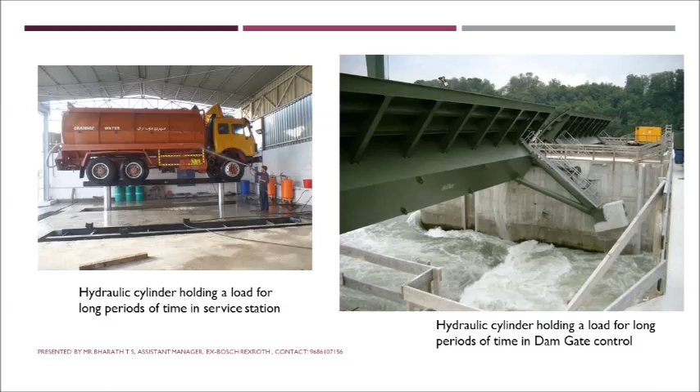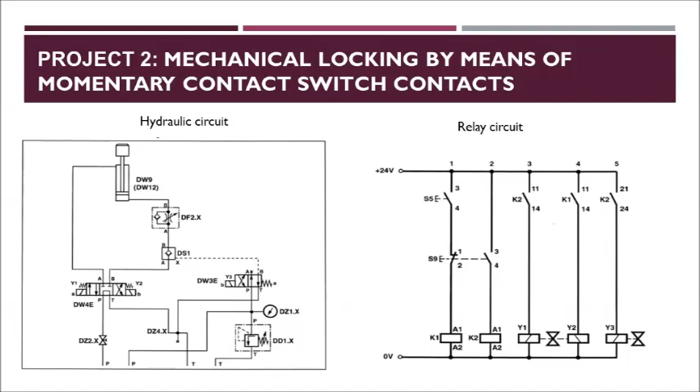Hello students, in this video I am going to demonstrate experiment number 2, where a pilot operated check valve is used to hold long time suspended loads. The title is mechanical locking by means of momentary contact switch contacts. First, I'll tell you the background of the circuit, and then we'll go to the simulation of this hydraulic circuit as well as relay circuit.

The name itself indicates mechanical locking of loads. Some applications are there. For example, in a service station, car or truck service station, the vehicle needs to be lifted upward for servicing, where service may take 30 minutes, 1 hour, or more than 1 hour, so that heavy load is held in a certain position for long periods of time. Another application is hydraulic cylinders used in dam gate control, where the heavy metal gate is held in a certain position for long periods of time by the hydraulic cylinder.

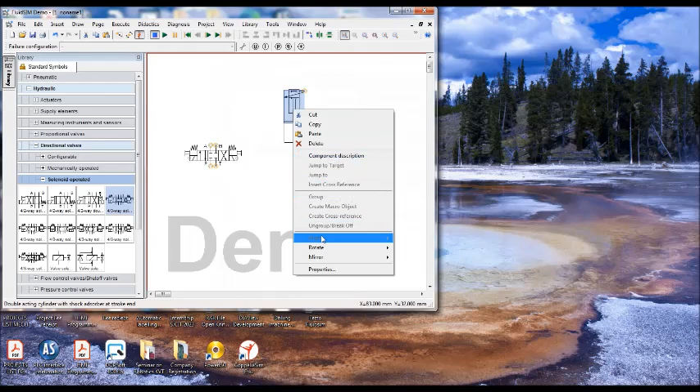Say a very large load is attached here, for example M, that is mass, a very large mass attached to the cylinder, and that is being controlled by a direction control valve which is solenoid operated. This is a 4x3 direction control valve, 3 positions are there, 2 solenoids are there, and for this valve, I want it this side, so AB is connected to actuator ports A and B.

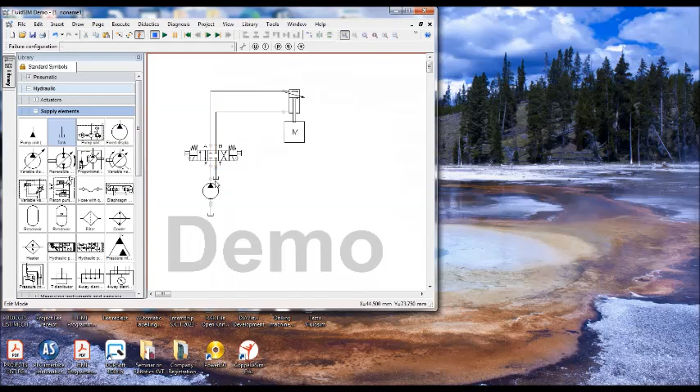And pump, you can consider as the fixed displacement pump, and then tank. So tank line is required here also. And next, since we are using fixed displacement pump, protection is required, so we should have the pressure relief valve. I did the protection here, and one more tank line is required here. So I should use a pressure gauge, which is available in measuring devices.

This is a very simple circuit, just we are discussing only the background of the experiment, we're not discussing the exact experiment yet. Here we should understand why we should use a pilot operated check valve. There are two types of check valve: a simple check valve or pilot operated check valve. That is the discussion we are doing here.

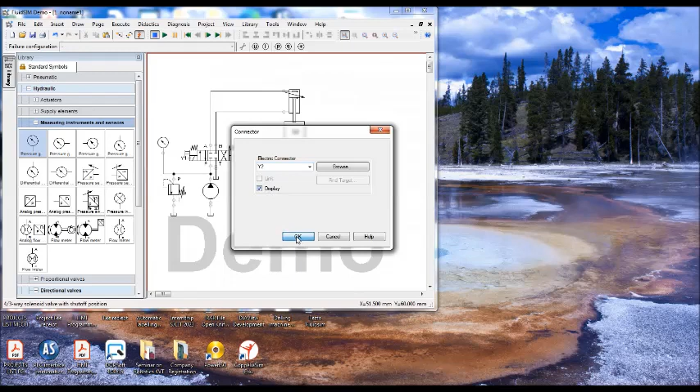This is a very simple experiment. There are three positions, and two solenoids called Y1 and Y2. All of you know the concept, right? When solenoid Y1 is on, what is the flow configuration? Flow configuration is P to A connection will be there, and B to T flow takes place.

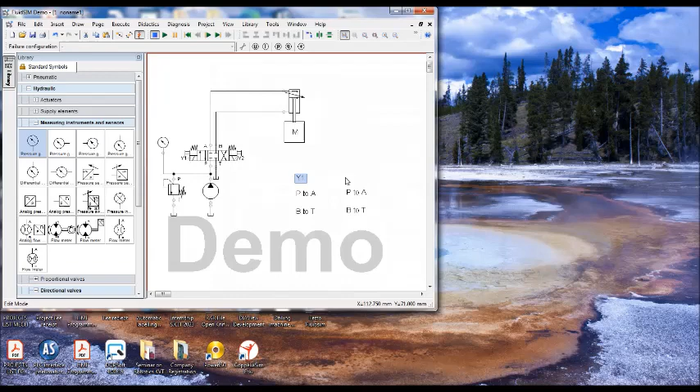This is when solenoid Y1 is on. Same thing when Y2 is on - what is the flow configuration? P to B, and A to T. This is the flow configuration.

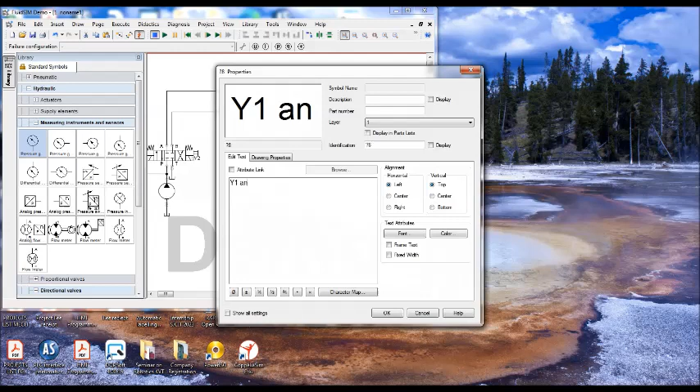So there is a third position, right? When solenoid Y1 and Y2 both are off, then what is the flow configuration? Flow configuration is all ports are blocked, that means there is no flow to A or B.

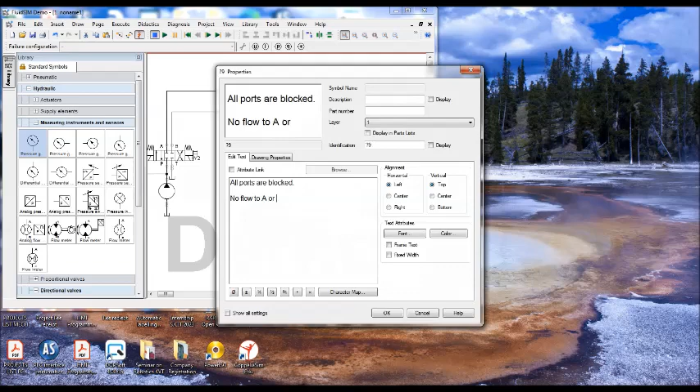To be precise, Y2 is on here, and this is Y1 is on. So when Y1 is on, P to A, B to T. When Y2 is on, P to B, A to T. When Y1, Y2 both are off, all ports are blocked - that is the middle position or neutral position, or home position we call it. There is no flow, so no movement. To be precise, in this circuit, as per the connection, if solenoid Y1 is on, the cylinder will move - it's a downward movement. When Y1 is on, downward movement.

Same thing, in the same way, when Y2 is on, it is an upward movement. So when solenoid Y1 and Y2 both are off, with respect to the connection we made, cylinder movement is stopped. So what it means is, when Y1 and Y2 both are off, cylinder is in stop motion. When Y1 is on, cylinder moves downward. When Y2 is on, cylinder moves upward as per the circuit.

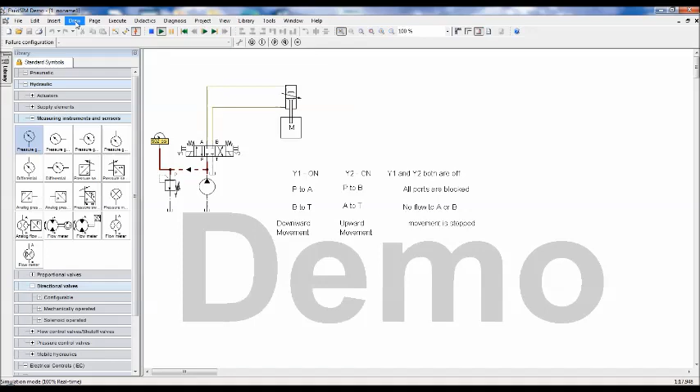Since all ports are blocked, movement is not possible theoretically. The graphical symbol also tells the same thing, so there should not be any movement. But what happens in practical is this is a spool operated valve. In spool operated valves there are two types of valves: spool operated and poppet operated types.

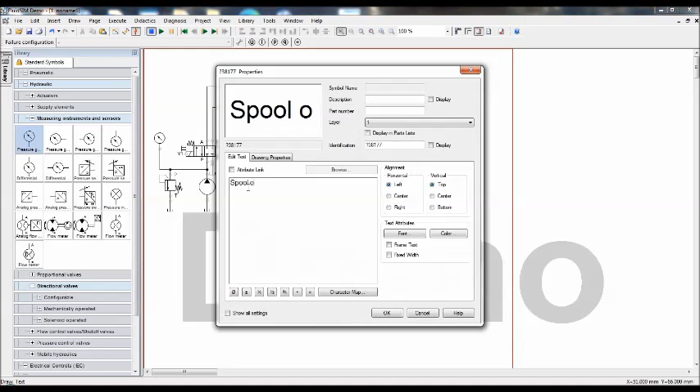So this valve is spool operated. The feature of spool operated valve is it has internal leakage. It is comparatively low cost compared to poppet operated valve, but it has internal leakage.

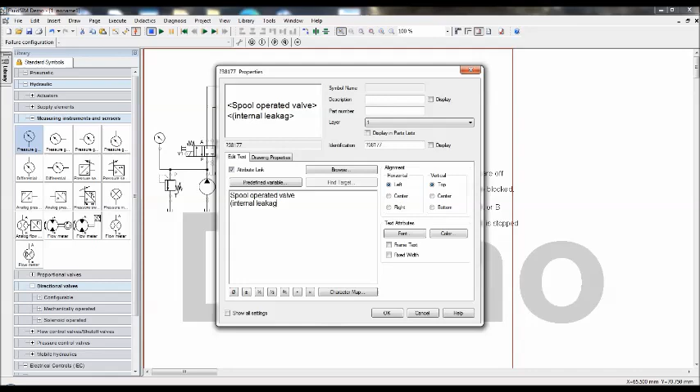So to be more precise, why internal leakage? Spool operated valve will obviously have a spool. In order for the spool to slide in the valve, there must be a radial clearance. Because of radial clearance, there must be a small leakage. There could be a small leakage from P to T, or P to A, or A to T.

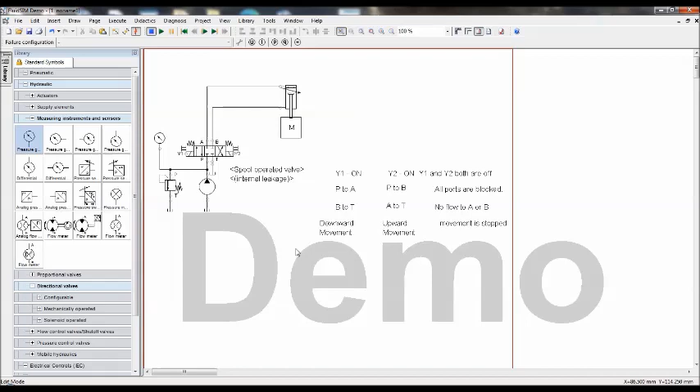So wherever a low pressure line is there, oil flows from high pressure to low pressure. Especially what we are talking about is this crossing of the lines. So that is the concept. Because of internal leakage, a small amount of oil from the rod chamber can leak to the tank because of radial clearance.

Assume that if the pump is off, for example, you have locked the position of the load. Assume that you have switched off the pump, but you are holding the load in a certain position. So the pump need not be on, since you are hydraulically holding that position. But there could be small leakage from the rod chamber to the tank.

So there could be some small movement, which we call creep movement. A very small movement will be in the downward direction. If you keep it for long hours, maybe a few hours, your expectation is the load to be held in that particular position, but after certain time, the load will be completely down. That means there is movement of the cylinder because of the attached load. This should not happen, otherwise it will create accidents.

So you have to hold in that position firmly. For this application, we should avoid the leakage from the valve. How can we avoid the leakage from the valve? Very simple, the thing is a flow control valve. In a flow control valve, a check valve is there, with spring or without spring.

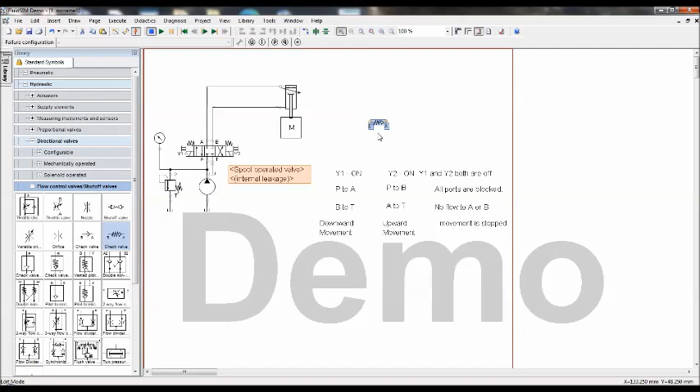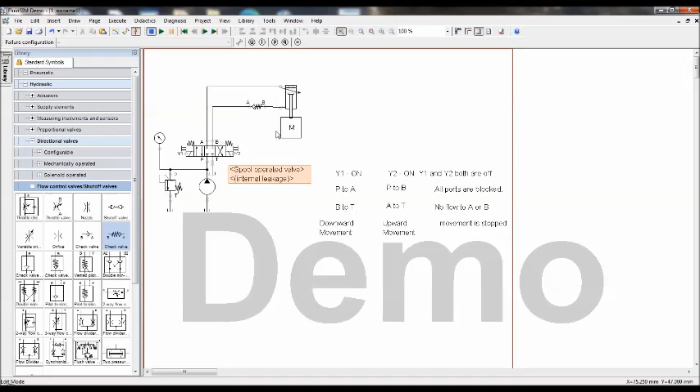So with spring it is used. Assume that, so what I'll do is, there is a leakage here, but if I put a check valve here, is that going to solve my problem? It is avoiding the leakage. Right now I've added a check valve here. Check valve, what is a check valve? What is its function?

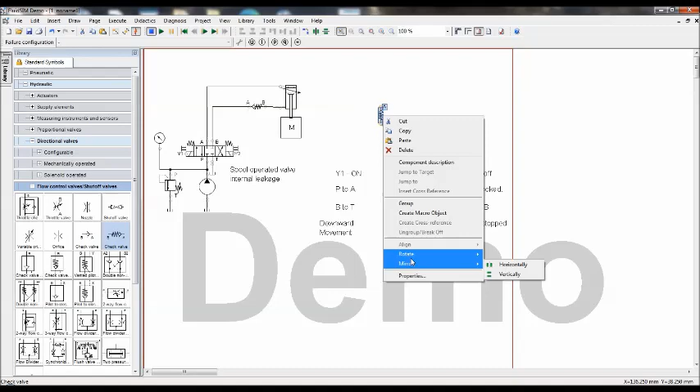Check valve allows flow only in the direction from A to B. Correct, A to B flow is possible. The same way, B to A flow is not possible. It's a simple check valve.

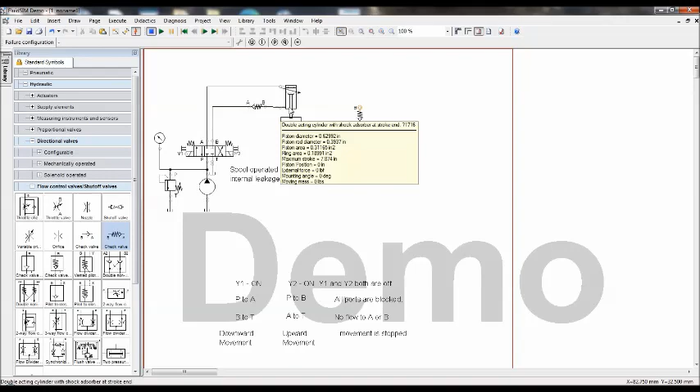So I'm going to keep it at the bottom here, since we are discussing this one. By having a check valve here, it is not going to solve the problem. It will avoid the leakage, but permanently there is no flow from B to A, meaning the cylinder is not able to move downward at all. So this is not going to solve my problem. A check valve is assumed to be a perfect leak-proof valve, but it's still not solving my problem.

Internal leakage is avoided completely, but downward movement of the cylinder is not at all possible. I want downward movement of the cylinder plus internal leakage to be avoided. How? That is what we need. There is another check valve called pilot operated check valve.

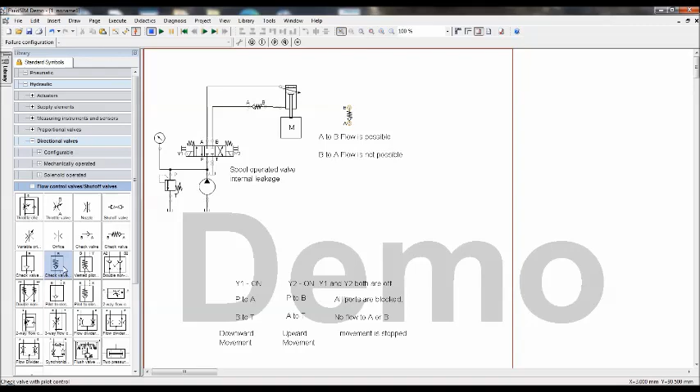It's a pilot operated check valve. There is an additional port called X. So a pilot operated check valve works same as a simple check valve.

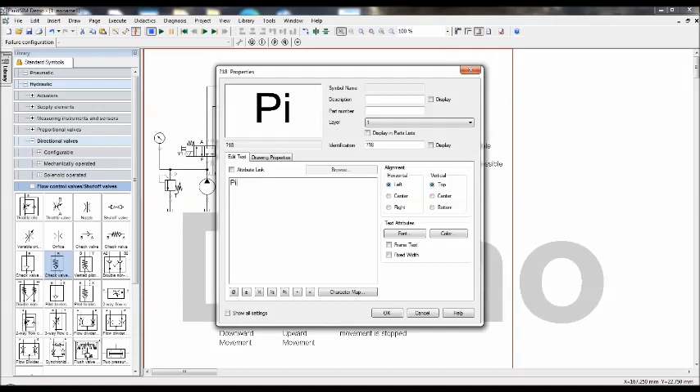Let me put this as a simple check valve. And what we're discussing is pilot operated check valve. It's also called PO valve. Sometimes in short we call it PO valve.

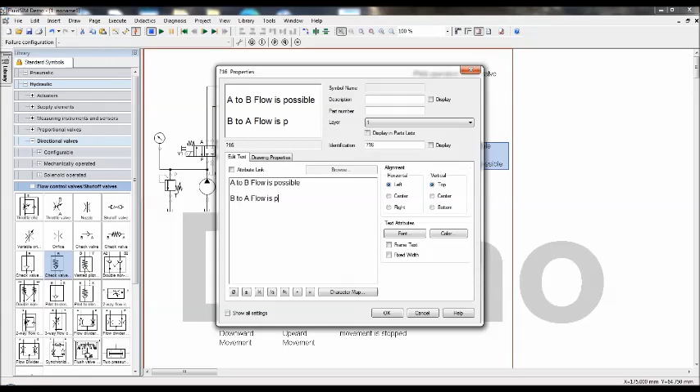So the flow condition is normal. A to B flow is possible. B to A flow is possible, but with a condition. Flow is possible if X equals high pressure, also called P. B to A flow is not possible if X equals T, meaning low pressure line. It is like high pressure, this is low pressure.

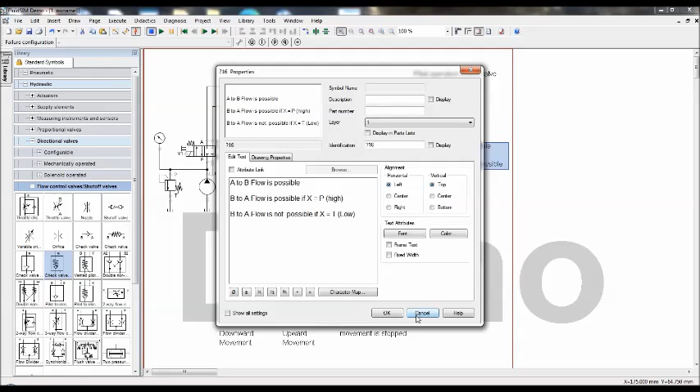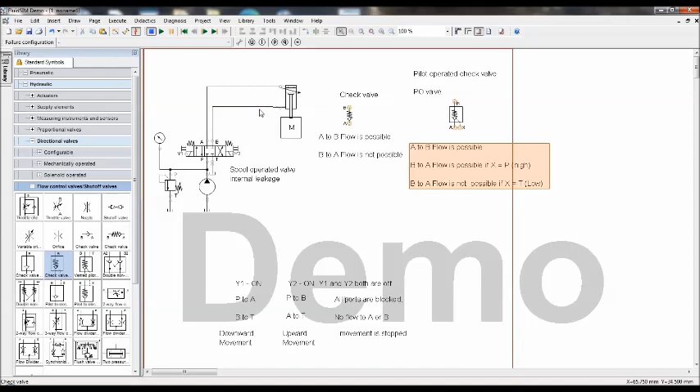So there's a special valve which has a third port, the X port. We can use this valve. With a certain condition, it will work like a normal check valve, but only then can that valve open and downward movement is possible. So we are going to use a pilot operated check valve instead of a simple check valve. I'm going to delete this, and then we can go for pilot operated check valve.

So I want it in this direction, so 180 degrees. Yeah.

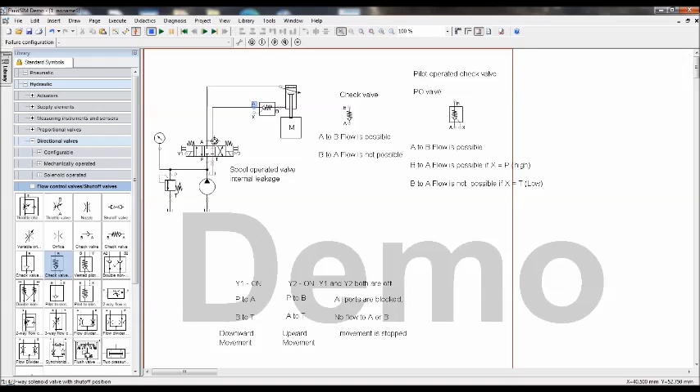So what I'll do is, whenever you want a downward movement, what is the condition when Y1 is on? P to A, so A line is high pressure. I know that A line is high pressure, right? So what I can do is connect this X to A. That is one possibility, but that is not used for this kind of valve. For this application, we should use a different type of spool called J spool. This is an E spool, the floating center valve should be used. For this kind of valve, we cannot connect X to A line. It's not recommended because it is not going to solve the problem.

So externally, we should use external oil pressure, so that whenever we want a downward movement, it can be operated. But right now, hydraulically it is locked. That means when the cylinder is in an intermediate position, oil is not able to flow. Even when the cylinder is at top dead center, oil is not able to come out of the cylinder because the check valve is there. It is completely locked. So even though there is internal leakage in the valve, there is no leakage from the pilot operated check valve. So the hydraulic cylinder is firmly held, and can hold the load in a particular position for a long period of time without any change in position. So that is the understanding.

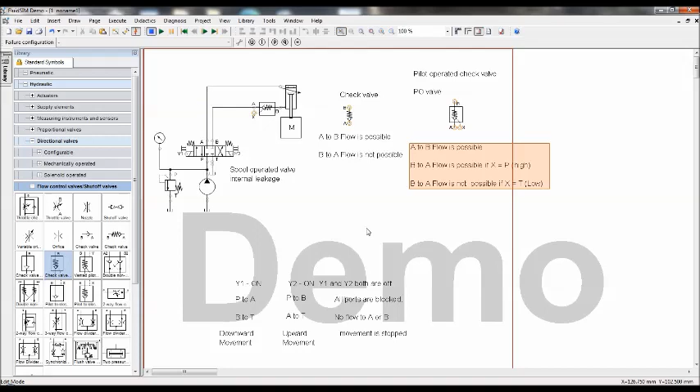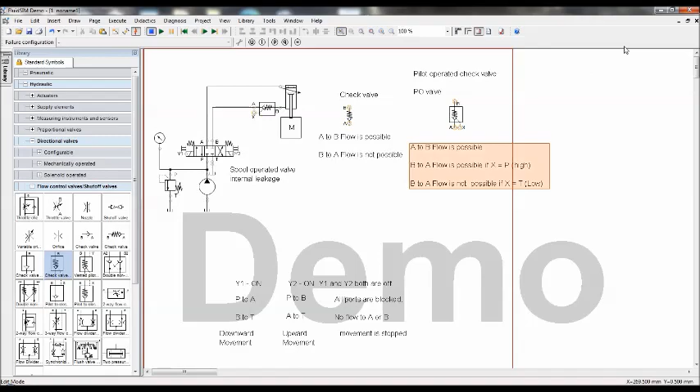So, okay, now right now I'm going to close this. I'll start from the beginning because it is only for 30 minutes. Run. Okay.

So hydraulic circuit, that is the actuator, we're using a double acting cylinder. This is a cylinder, and we should use a 4 by 3 direction control valve. So direction control valve, solenoid operated.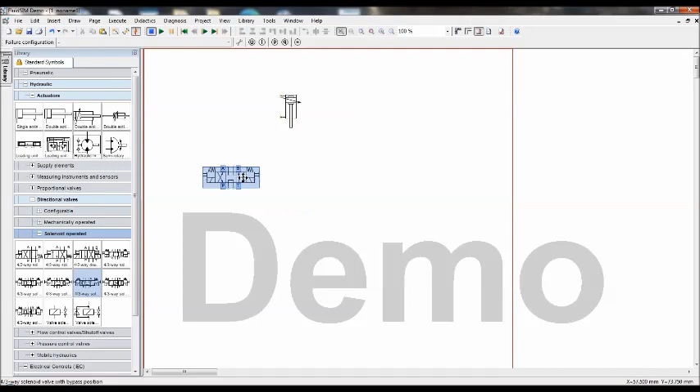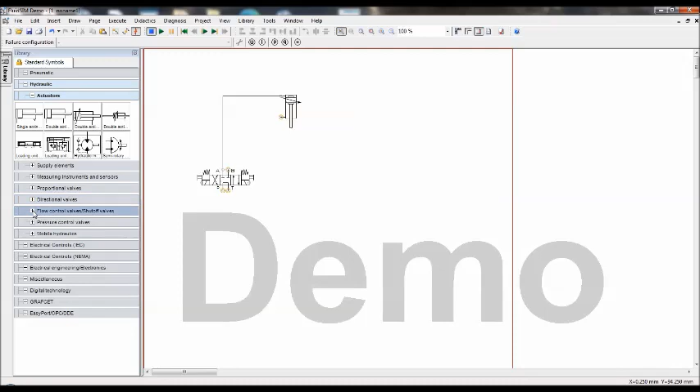4 by 3 tandem center is available here, this is a tandem center. See the circuit here. A is connected to the rod chamber, and B is connected to the piston chamber via pilot operated check valve. So DS1 is a pilot operated check valve, and DF2.X is a throttle check valve. First we'll take the pilot operated check valve, which is available in the flow control valve.

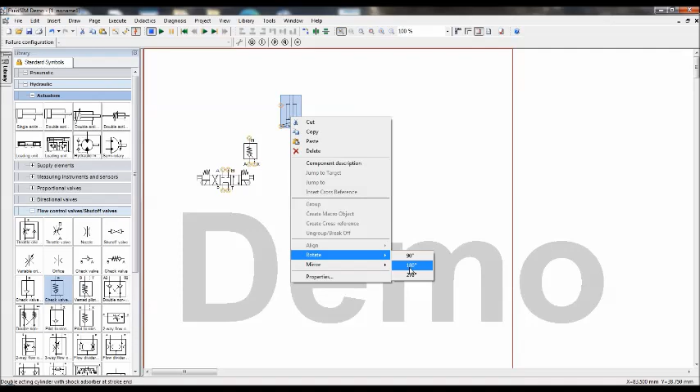And let us orient the cylinder like this. That means I'll move it in this way, it should be good. Sorry, this is the one I'm checking for orientation. No, this is rotated by 90 degrees and mirrored vertically. Yeah, this is fine.

So here, as per the setup, it is above, right? So we want it in... yeah, this is good. So A is connected to rod chamber, and B is connected to pilot operated check valve, plus throttle check valve is available here. So what is the direction? It should not allow flow from piston chamber.

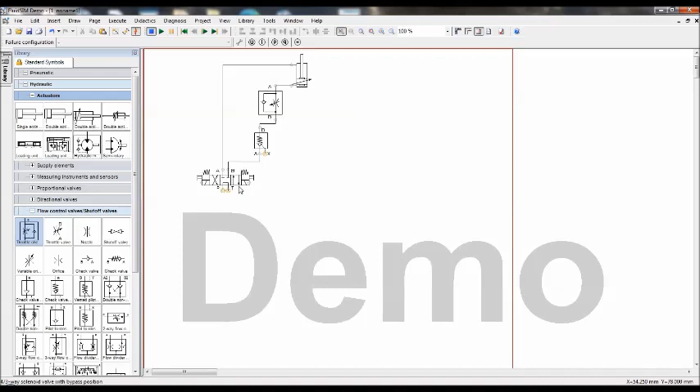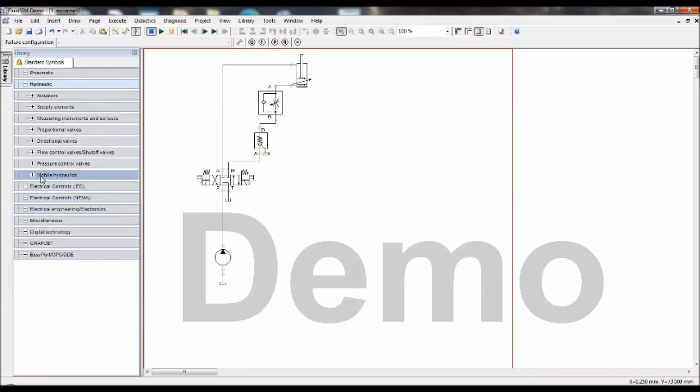Okay, and A is connected to B. X is not connected there, and we should have a pump, then tank, that is the same circuit, and protection circuit should be there. So that is pressure relief valve, we should use it in the P line, and tank should be available here. So pressure gauge, you can have it as usual. It is available in the measuring instruments.

So this completes. Okay, there is one more. So we have to supply hydraulic oil to the X port, right? That is from externally. So for that, to have a high pressure and low pressure control of X port, then we should use another valve. Okay, that is another DW3E, that is a 4x2 direction control valve.

Why? Because in the laboratory, 2x2 valve is not available. Oh, sorry, 3x2 valve is not available. So 3x2 valve is enough actually for this application, but 3x2 valve is not available in the laboratory. So we are using 4x2 as a 3x2 valve application.

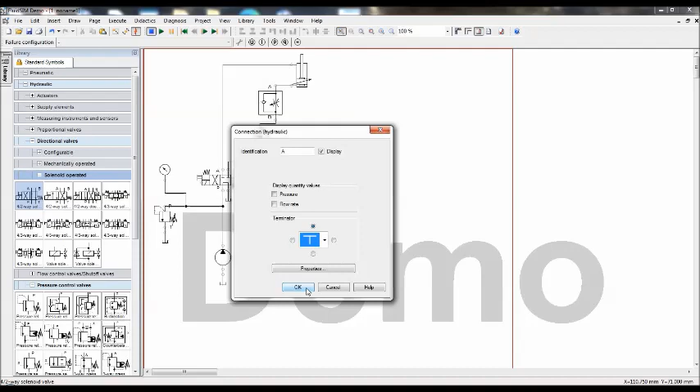Okay, so we have to use solenoid operated 4x2 direction control valve. Yeah, this is a valve, but we should not use the port A here. Okay, so we have to block it. So to block, double click on the port A, and you should select it as a terminator. That is, terminate means the flow is not possible. See, I have terminated A.

Okay, so B, what I'll do, B I'll connect it to X. Okay, so P should be connected to P line, and T should be connected to T line. That's the same connection. So meaning is, now there is a new solenoid called Y3.

If solenoid Y3 is on, say right now solenoid Y3 is off, right? What is the flow configuration? Let me explain this. Draw text. Now Y3 by default it is off. If Y3 is off, what is the flow configuration? P to A and B to T. Right now it is off. So since B is connected to tank, B pressure is tank pressure. Since B is connected to X, X is also tank pressure.

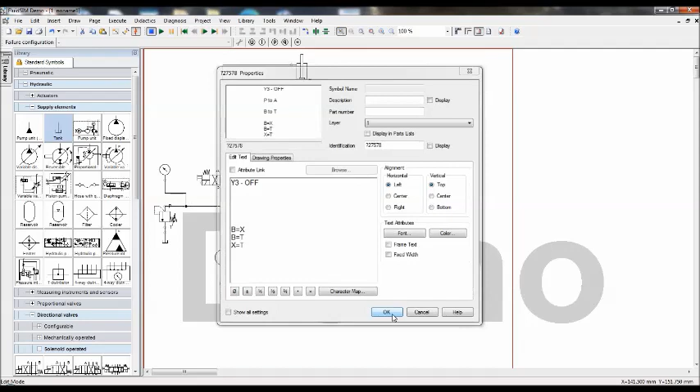Okay, so I'll have more meaning here. See, B equal to T, B equal to X, and also B is connected to tank. So what is the meaning of from these two equations? So that nothing but X equal to tank pressure. X equal to tank pressure. This is a very important thing. So like that,

another condition is when Y3 is on, flow configuration is P to B and A to T. Now B equal to X, but B equal to P, because there is a change. So what is the meaning from these two equations? X equal to P. X equal to P. So now that means when Y3 is off, the condition of X is tank pressure. When Y3 is on, the X pressure is high pressure.

So whenever you want to have a downward movement, you can switch on Y3, and whenever downward movement is not required, that means if you want to hold firmly, you can switch off Y3, so that oil leakage is not possible from the direction control valve, because oil itself is not coming out of the cylinder. So there is no leakage in the cylinder. You can use a spool operated valve, so that still you can hold the load, and cylinder can hold the load firmly for long duration of time.

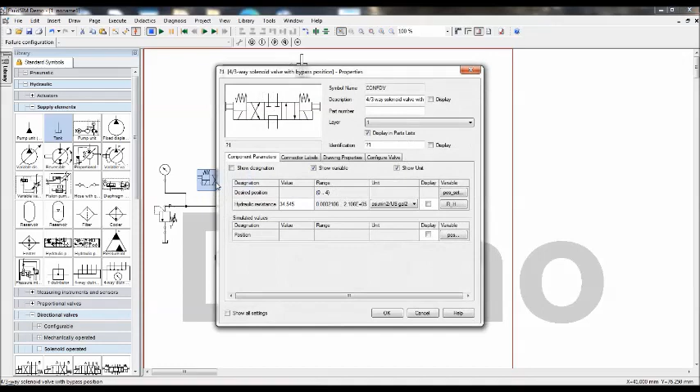Okay, so remember this. See here, when solenoid... if you refer the configuration here, Y1 means P to A and B to T. So configuration is straight here. So here cross is there. So I am going to change that connector. Let me see. Can I change the position?

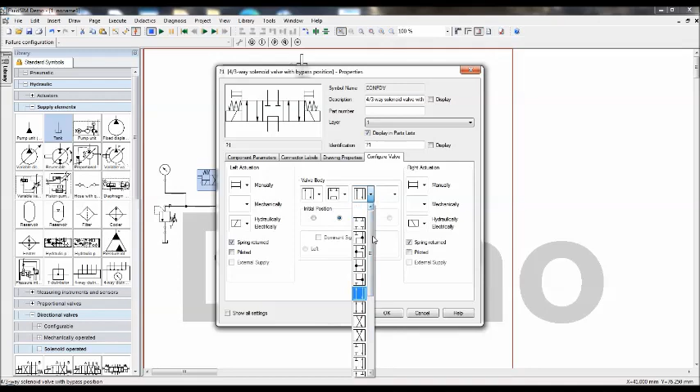Yeah, position settings. Connector configuration. Yeah. In the left side, I want straight. In the left side, I want straight. In the right side, I want cross. So that only I'm changing. Okay, because it has to match with our manual. Okay, so now we completed the hydraulic circuit, but now the relay circuit is pending.

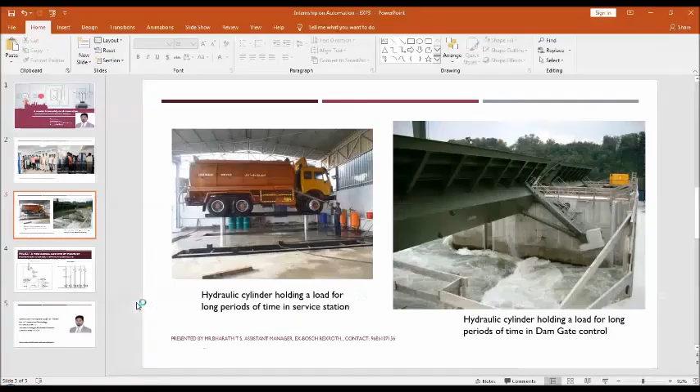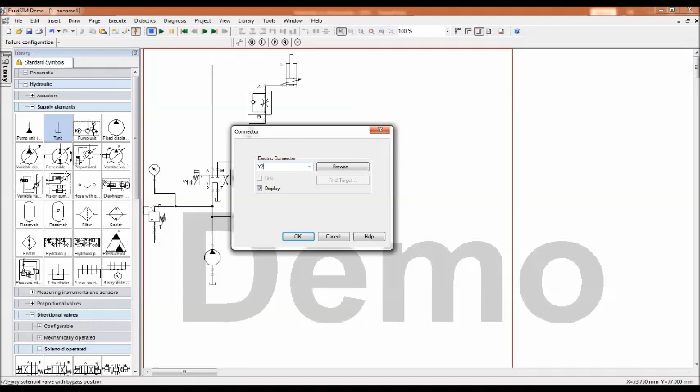When solenoid Y1 is on, P to A, that means downward movement. So downward movement should be possible only with the condition of Y3 on. If Y3 is on, then only the downward movement should be possible. Otherwise it's not possible, because X pressure will always be low pressure, since B is connected to tank when solenoid Y3 is off. So what is the condition for downward movement? Solenoid Y1 should be on plus Y3 should be on.

For upward movement, only Y2 is enough. The condition of Y3 is not required, because whenever solenoid Y2 is on, P to B, and oil can flow easily from A to B without any condition of X. So it is a bypass valve, bypassing the flow of X, meaning X condition is not required.

So what is the condition? To move downward, Y1 and Y3; to move upward, only Y2. This is the condition we have to build in the relay circuit using relay.

So now one switch is taken. In the laboratory, you can observe that one switch can be used as normally open as well as normally closed, right? So that switch, that is the indication. This one is S9, we are using it as normally closed as well as normally open. Same switch can be used. Let us see whether it is there in the laboratory or not.

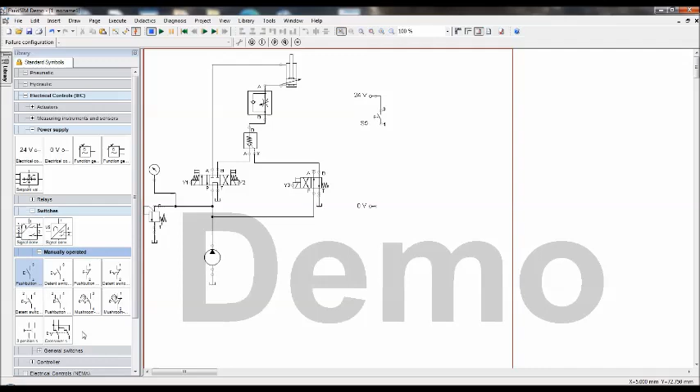Go to the electrical circuit, IEC standard, power supply 24 volts. We'll take a switch that is manually operated. We'll take S5 as a normally open switch, give it the same name, S5, and display it. Next we'll take a switch which can be used as normally open as well as normally closed. Let me see if that is there or not.

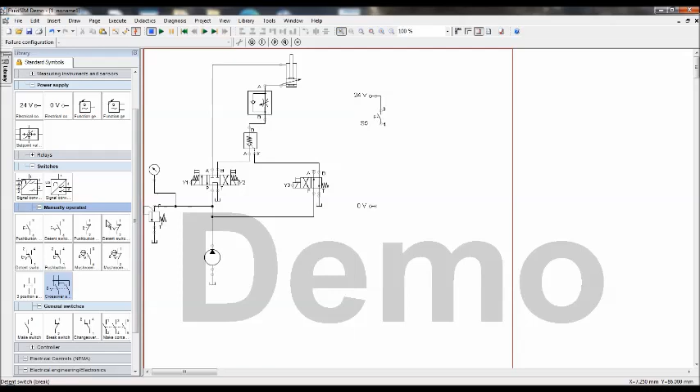Yeah, crossover switch is there. Let us see. I can use one switch as normally... no, this is both normally closed. Okay no problem, we'll use one normally closed here, and normally open once again we'll use it.

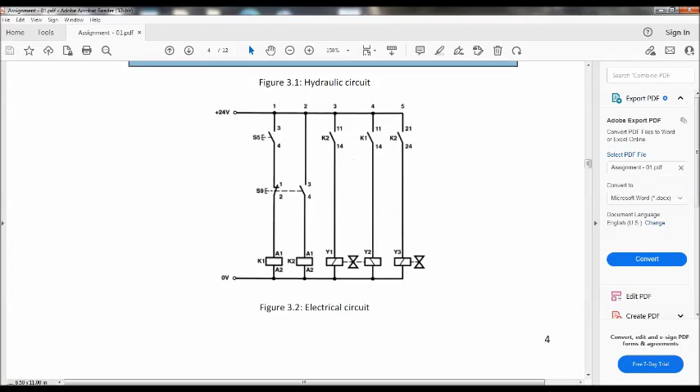Go to the relay section. There is a coil, is there? This is K1. Assume that I'm using S5 for upward movement. So for upward movement, what is the condition? Only Y2 is enough, right?

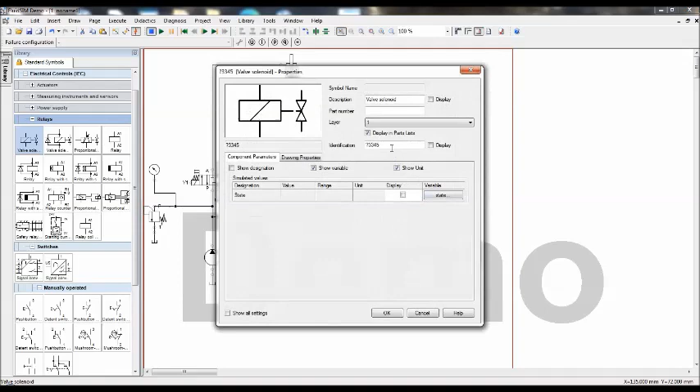So K1 is for upward movement, and take the general switches, that is normally open contact, and this is for K1. I have to take one solenoid. How many totally? There are 3 solenoids. So this is solenoid Y2. It will move upward when solenoid Y2 is on.

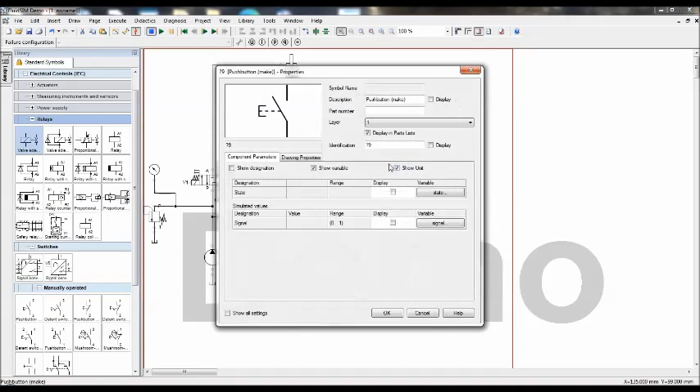But for downward movement, we have to operate the S9 switch. So this is also S9 switch. S9 switch is used. Now by operating S9, K1 cannot be on because it's normally closed. But wait, this should not be used.

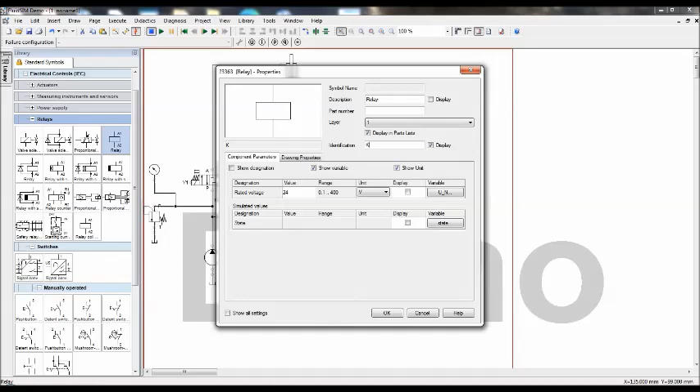S9 will take another relay called K2. Here K2, and you can take it here, it's the same. Both are S9. So when you operate S9, it is going to cut off the power supply to K1, and it will switch on K2.

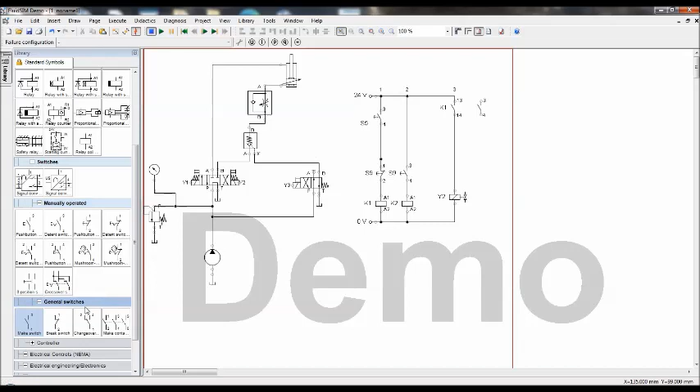So what is our requirement? When K2 is on, we have to switch on... both are K2, this is K2, and this is also K2. Both are K2, and you go for the solenoid. This is solenoid Y1. This is solenoid Y2. Sorry, this is solenoid Y3.

Y3 and Y1 should be on at the same time. Okay, so now go to the simulation.

So here by operating S5 it will move upward. For downward movement you have to operate S9. See, can you check the condition of X? When Y3 is on, P is connected to B. So since B is high pressure, X is high pressure, and the check valve is open. So when Y3 is on, then only it will allow the flow in the downward direction, allowing oil to flow out of the cylinder from the piston chamber.

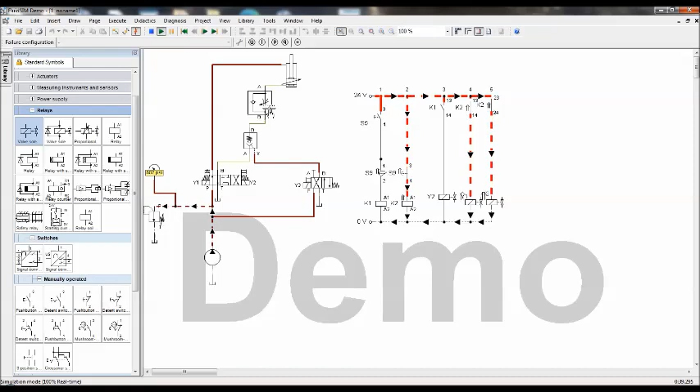In this condition, for example, this is an intermediate position, not upward, not downward. Now the oil under the piston is under high pressure because a heavy load is acting on it, so it tries to come out. But B to A flow is not allowed, because X is low pressure, since X is connected to B, and B is connected to tank. So now the load is held firmly in that position for long periods of time because there is no leakage.

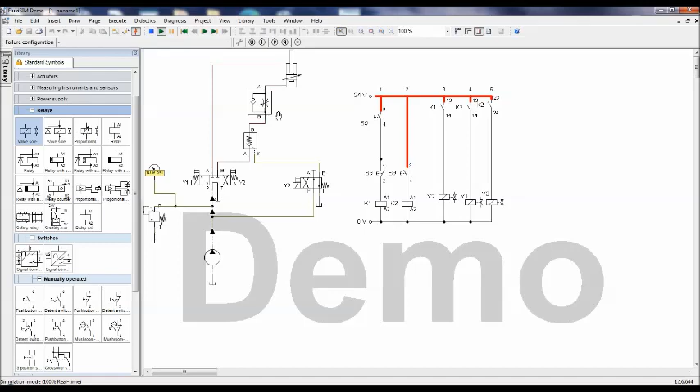This is how this experiment is demonstrated, and we can save... save feature is not available in the demo. You can save the circuit and the Word file and submit the assignment.